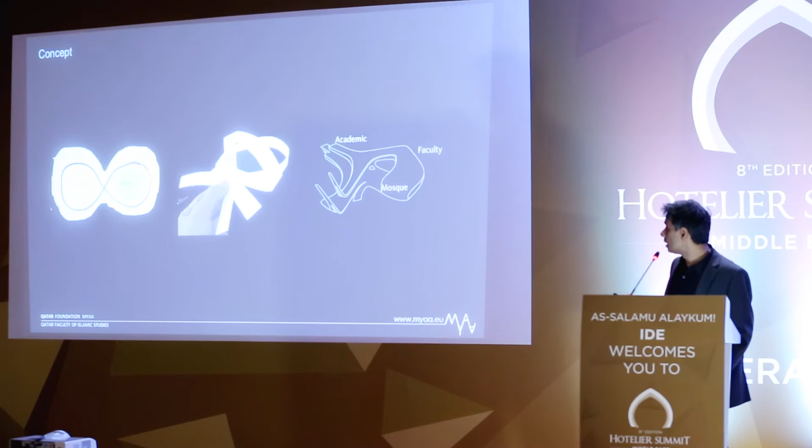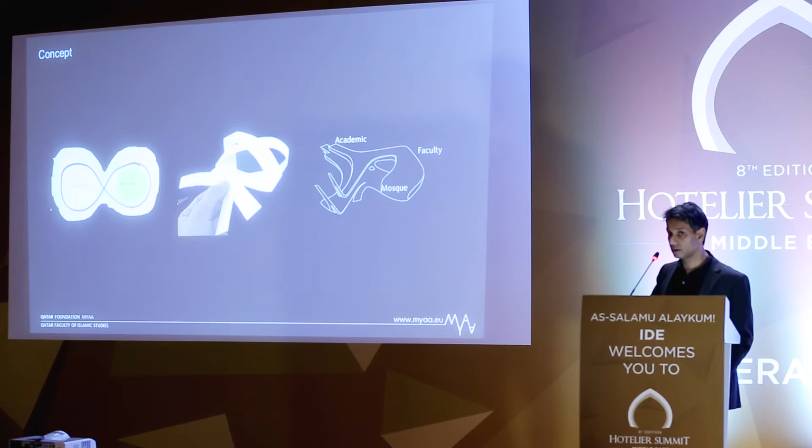In Islam, there is a kind of relationship between prayer and learning. It is incumbent on a Muslim to seek knowledge. So the idea for the building is essentially an infinite loop between learning and the prayer space - there are many paths through the building, and you can always go between the faculty and the mosque.

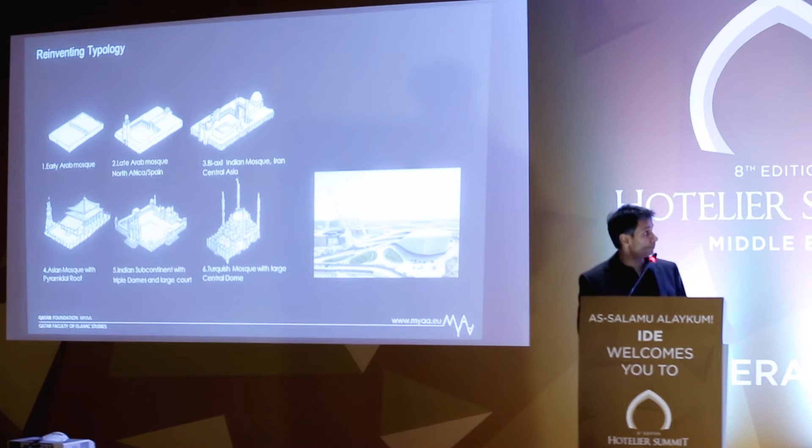The other main idea behind this project is to change perceptions and preconceptions about this type of building. Historically, Islamic buildings, mosques or teaching spaces followed a very traditional route. The thing is that a lot of these buildings are also regional and cultural. So what you might understand to be a mosque, let's say in early Arabic architecture, is different to how it's interpreted in India, and again different to how it's interpreted in China or Turkey.

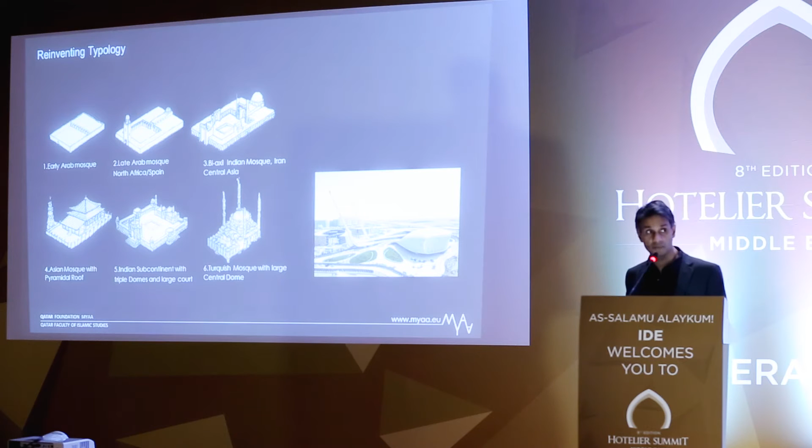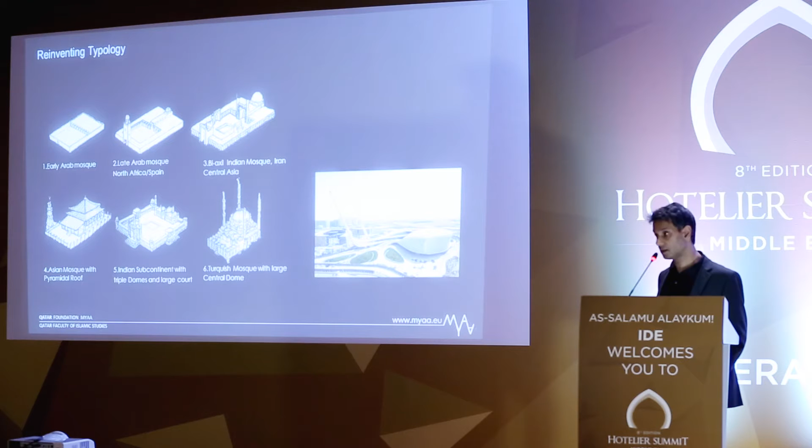What we're trying to say with this slide is that there is no one solution - there are many solutions, and these solutions come out of culture, identity, and the image and direction your community is heading. The idea of Islamic architecture is to try to create something which is at the same time contemporary, but also traditional. How do you do that?

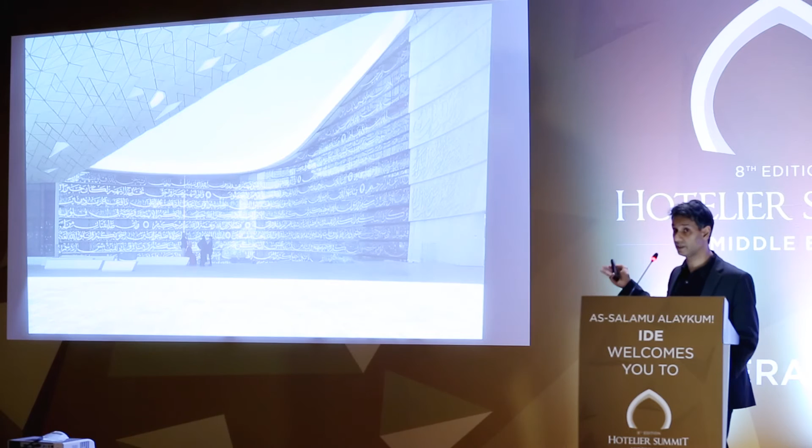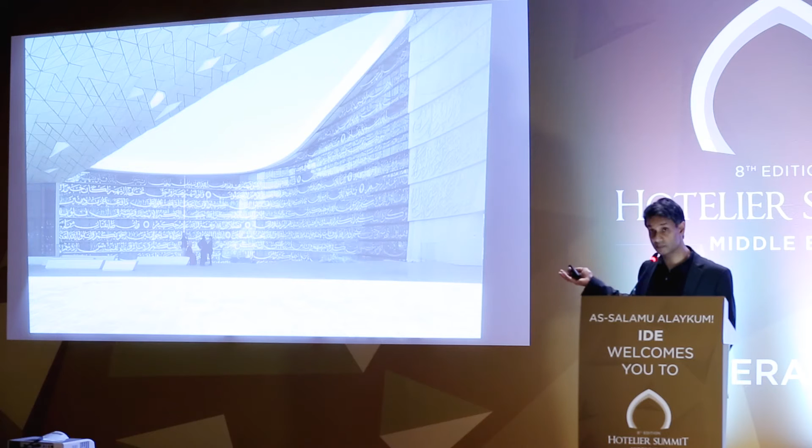This is one of the main courtyards of the building, which has verses from the Quran. So it's a very contemporary courtyard, but again it's overlaid with traditional verses from the Quran, which appeal and address the local audience.

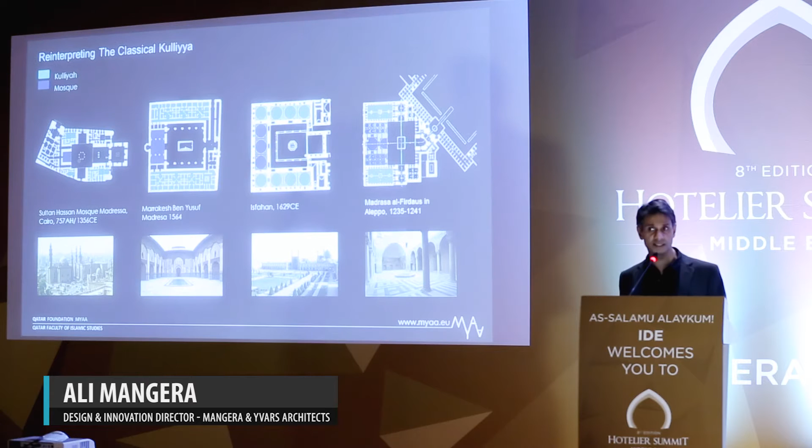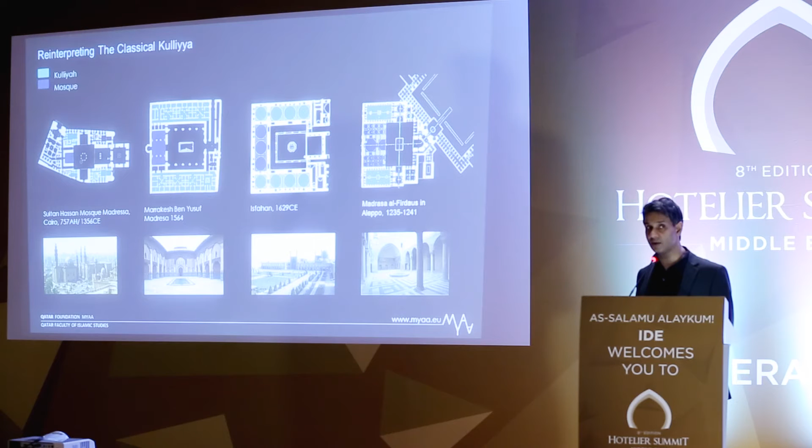We're also changing the perception of how ladies and men can interface with each other. So the prayer space is also accessible to ladies, and I think this, for the Arabic world, is quite an achievement. I think it's very important that women in this society are not only educated but allowed to participate on an equal basis with their male colleagues. I have to say that Qatar Foundation, and Qatar in particular, are really ahead of the curve.

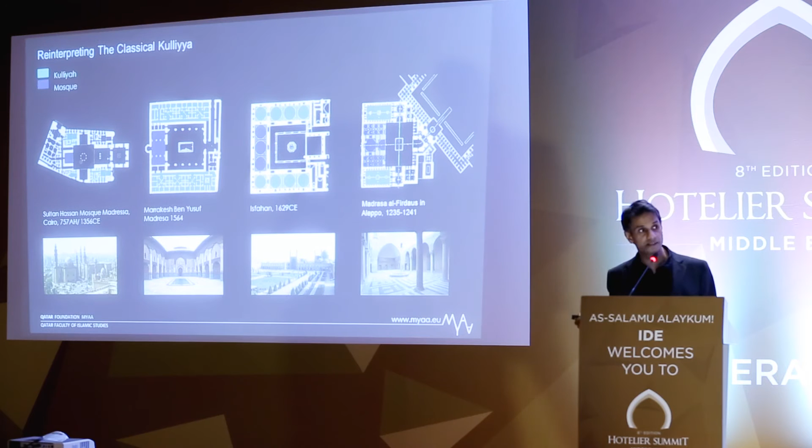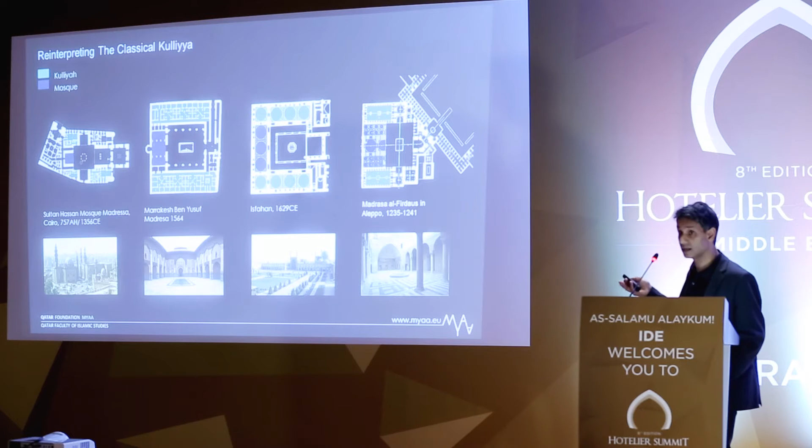How we developed the project: although it looks like a very contemporary building, we started to analyze very traditional buildings performing the same function. Here we've got a building in Egypt, the Sultan Hassan, and other examples from around the Muslim world. Essentially, the light blue is the teaching space, and the dark blue is the prayer space.

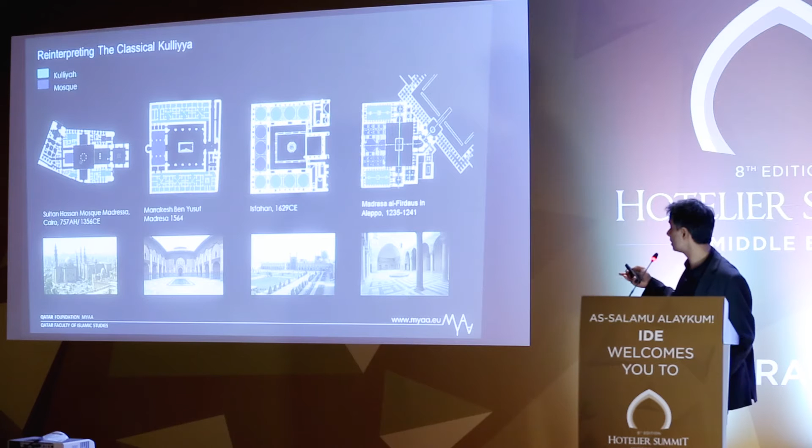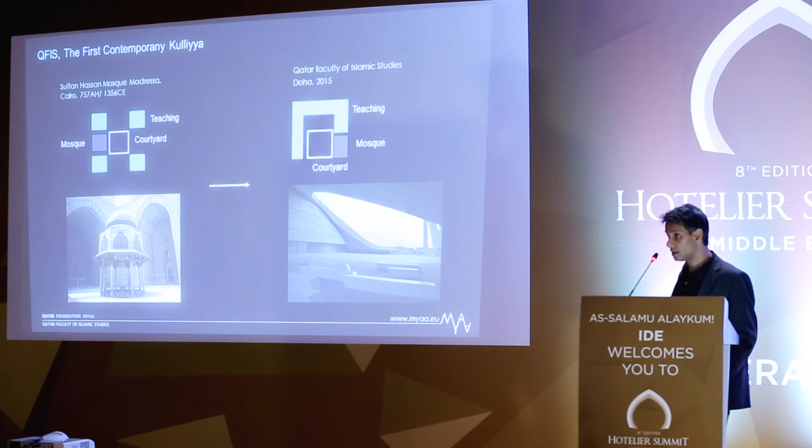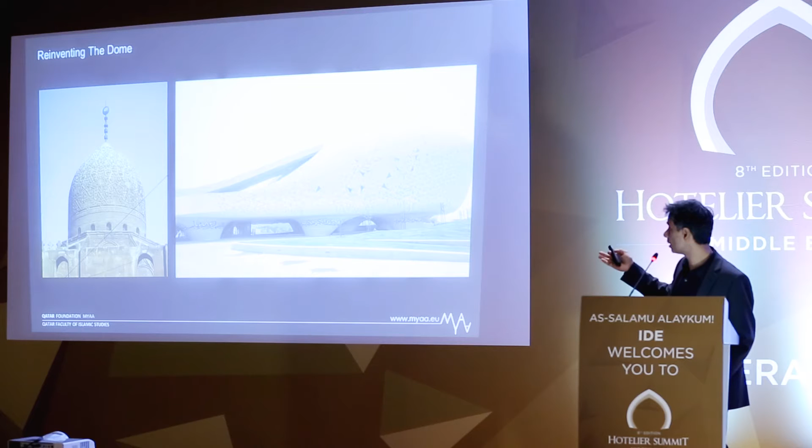So what we did was unpick the arrangement - how you unpick the prayer space and how you can reposition it. So although it looks like a very contemporary building, the ideas are actually more or less from a very old set of principles - reinventing certain established ideas. Here we have a dome, and we reinterpret it using tiling, using panels, using ceramics in a very contemporary way.

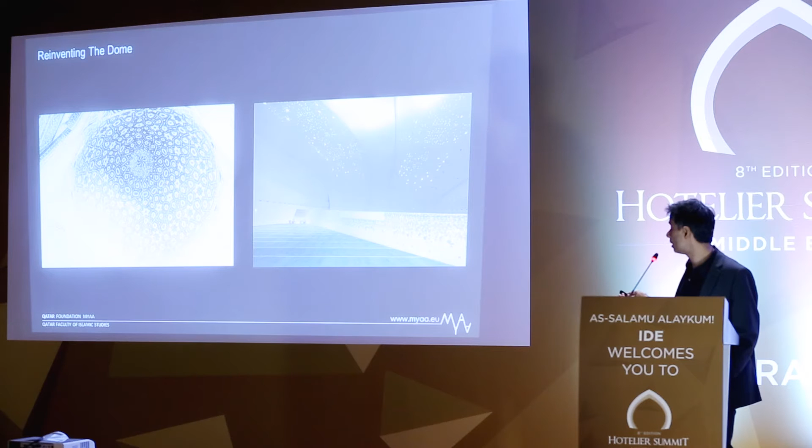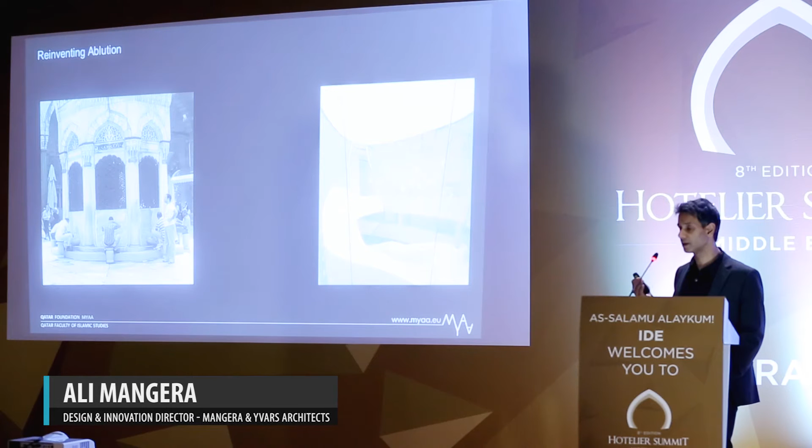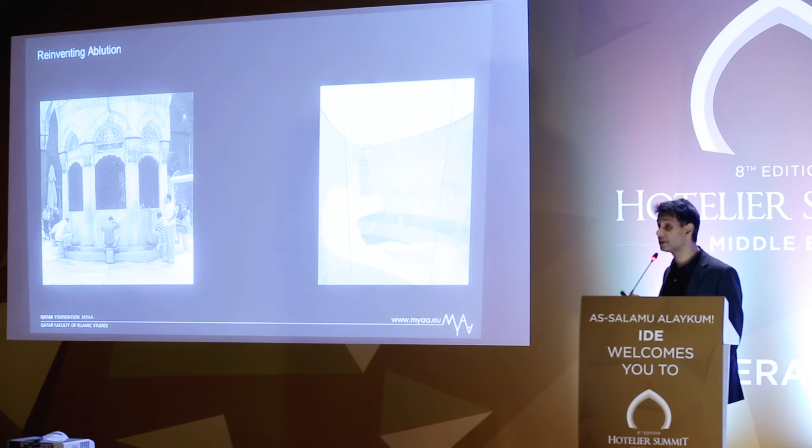Ablution is very underrated in a lot of buildings, because it's a very key moment. It's when you're going from an outside space, cleansing yourself, and then entering a spiritual space. This moment of transition, I think, is very critical.

I think how some historical buildings, for example in Istanbul, interpret this are quite powerful, and we try to do something similar in this building.

We have an enormous staircase which runs maybe 5 stories with water coming down, and it's kind of a symbolic separation of the faculty from the mosque. Also, you create these microclimates, these gardens around the building.

One of the key spaces is the entrance. As you approach the building, it's lifted on the 5 pillars of Islam, which have calligraphy on them, and it creates this very cool undercroft space. Symbolically, the building is lifted, and it has a cascade of water coming through it, so it feels like a very cool, refreshing place to be.

This is one of the most popular buildings on the campus because obviously it's a mosque. So people are coming there from outside, and also people are just coming to look at and explore the building.

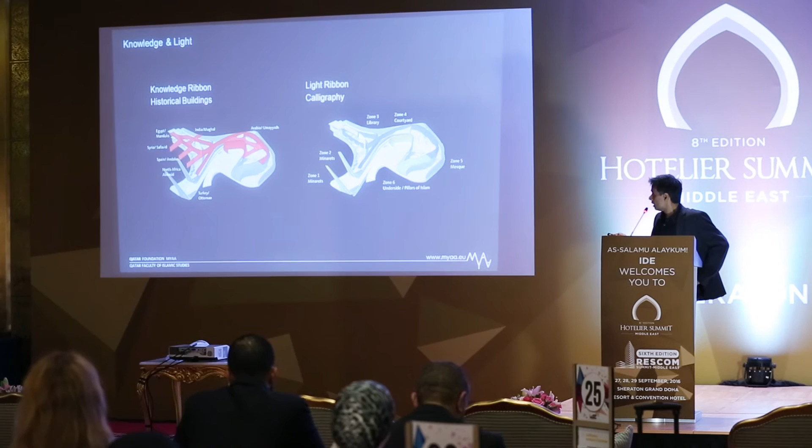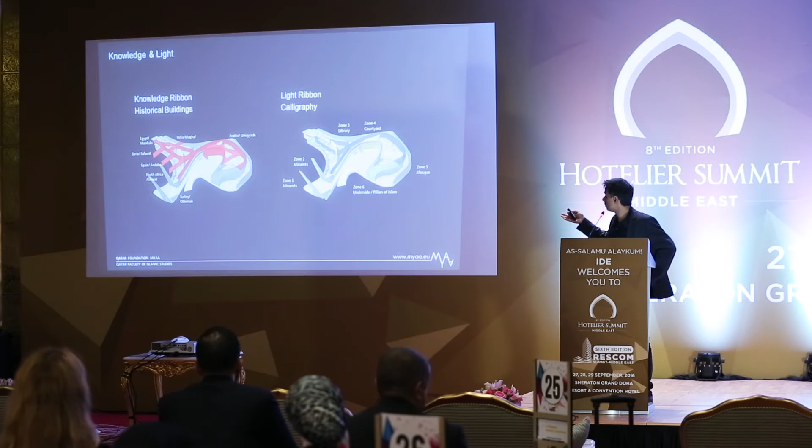The other thing we did, we created within the building themes or areas which pick up on the history of Islamic civilization. So we looked at the Arabic period, the Umayyad period, the Egyptian Islamic period, the Spanish period, and around the world, India. The building is broken up into little themes, and within that we display images of historical buildings. It's a way for students, who are studying law, economics and religion in the building, to also be educated about their culture.

The second ribbon is the ribbon of calligraphy and ayahs from the Quran. They run from the masjid right up to the minarets, a very visible expression.

What's really important when designing contemporary education space is not to think about classrooms as a place where you just sit there and the teacher teaches you. It's about how students are mixing, how different students are coming into the building, what sort of atmosphere you're getting, how you can create incidental encounters and meetings. Through that, you can generate new ideas so students can get enlightened in that process.

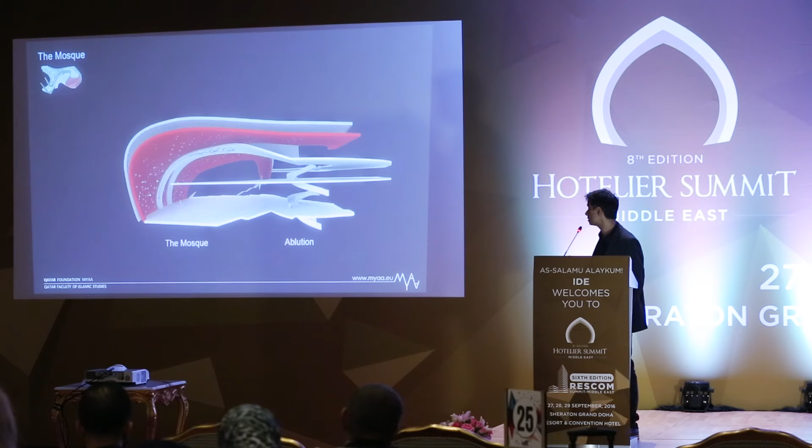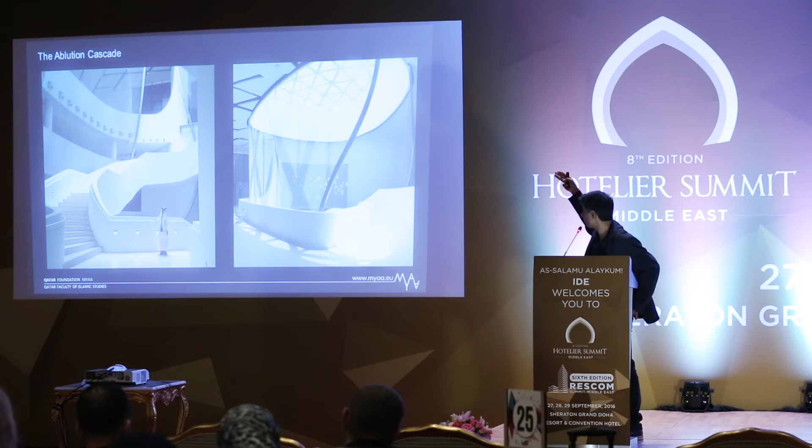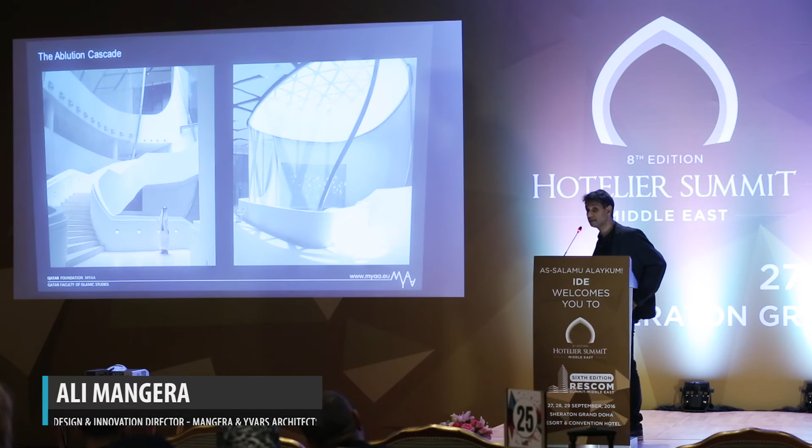These are some of the staircases, which are all very sculptural. The ablution - we're trying to balance this, and there are some issues that we're finalizing. But this whole wall, it's like a mesh, a very fine mesh, has water coming down 4 stories. So when you're inside that space, the staircase going up the building, it's an amazing experience of the water coming through. You're like in a vessel with water, but walking up some stairs. It's something that's never been done.

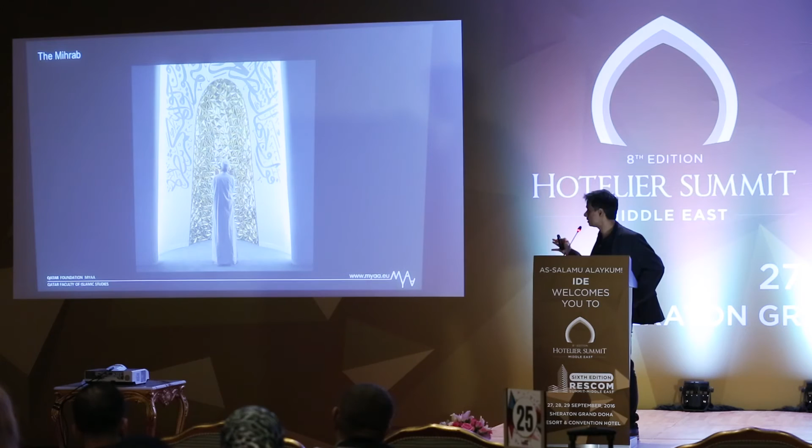These are just some of the underlying ideas that have gone through the project - how we created the calligraphy, how we built it. Because small things like if you have the calligraphy on the outside and then the sun comes through, and if you're walking, you might be walking on the letters from the Quran. So you have to create a diffusion, you have to break the pattern of light. So we have a secondary screen that does that. Lots of little things have gone into this.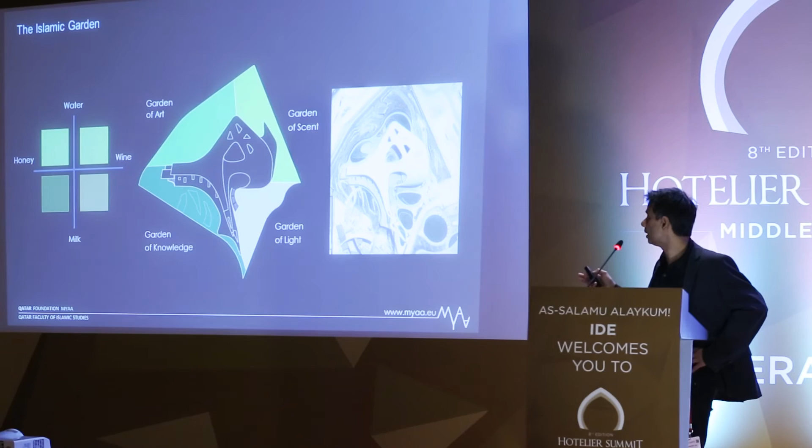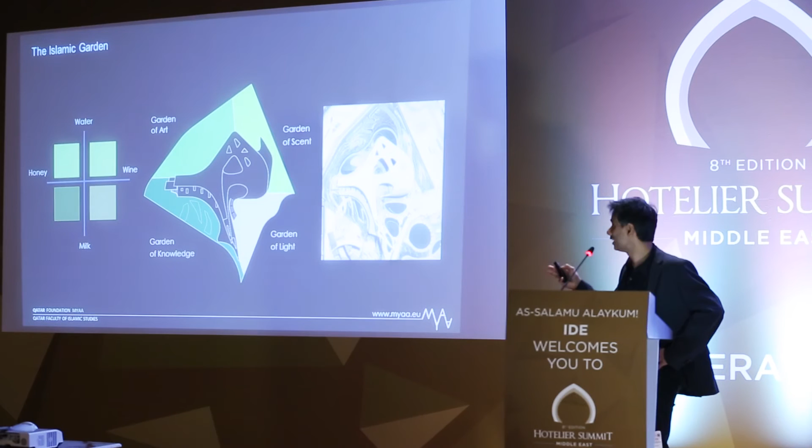So even things like the gardens are based on an Islamic metaphor. A traditional Arabic garden, or if you look at a Moroccan garden for example, is a 4-part Islamic garden. And the gardens normally have water, and the 4 rivers of paradise - river of wine or alcohol, water, milk, and honey - these are the 4 rivers. So we have these 4 rivers running through the project, which break up the landscape. And also we have 4 gardens around the building.

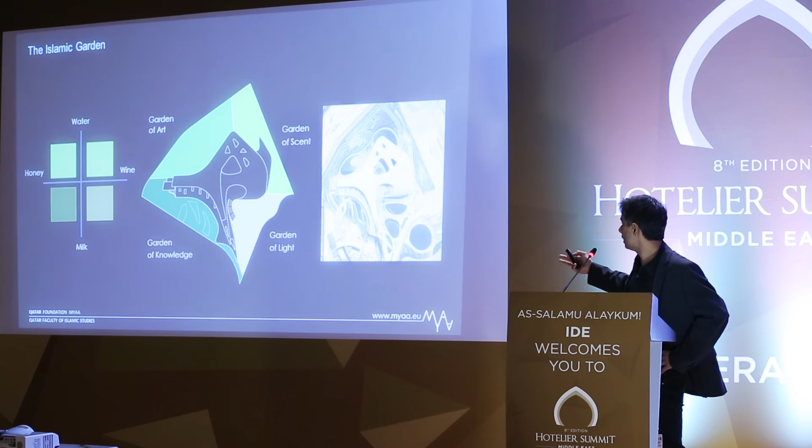So on this side, a garden of knowledge where you can sit outside and learn, read your books, and have a dialogue with the neighboring building. And then a garden at the rear where you can sit down, it's like an outdoor lecture theatre. And then another 2 gardens on the side.

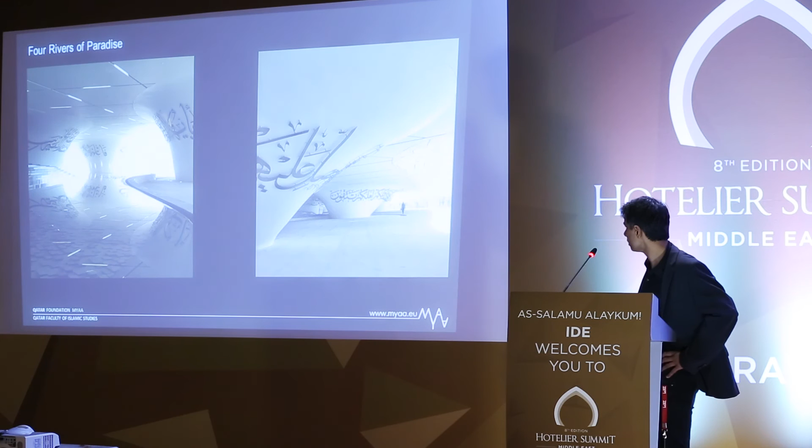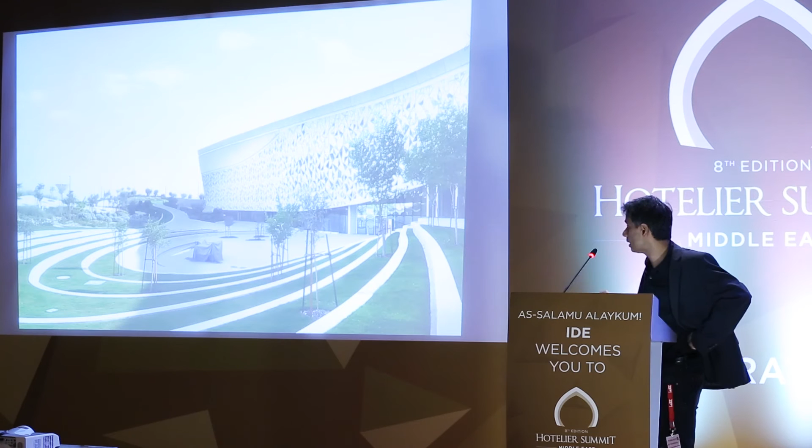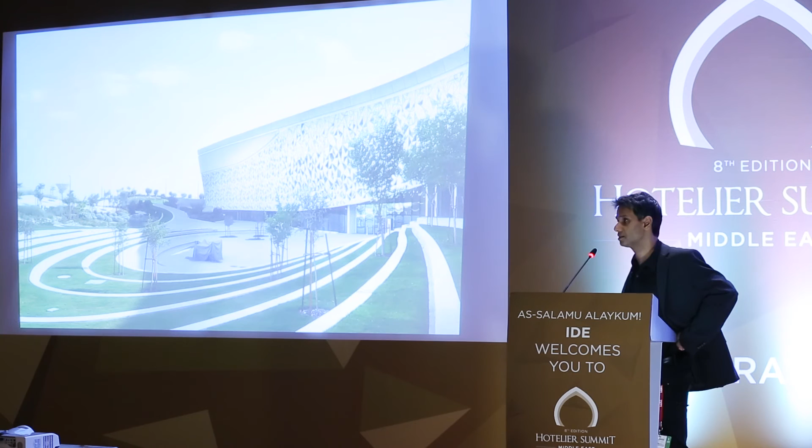Some of the outdoor landscaping. This pattern that you see, I'll come to that in a minute, but it's very carefully calibrated so the light in the building gives you natural daylight, but not solar heat gain. So the whole facade has been modulated to allow for that to happen.

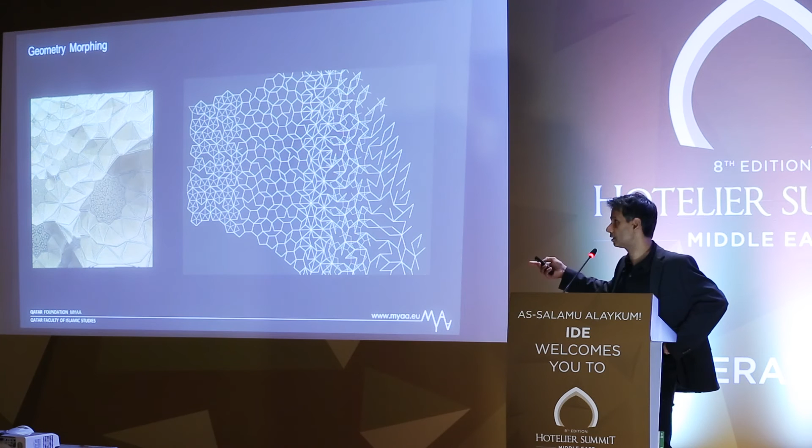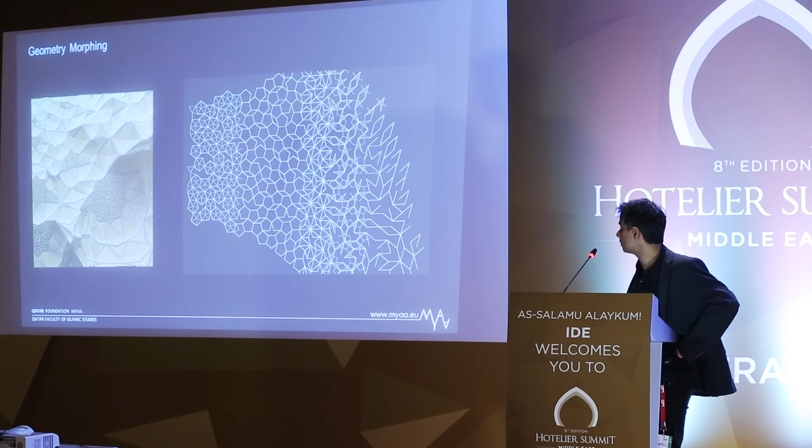We started by looking at how, it's really simple just to have an Islamic pattern and say, oh well, you have a pattern. But how a pattern can change, how it can evolve across the building. So we started looking at how patterns can morph and one pattern can become another, which I think could lead to other solutions. And this is a kind of typical tiling model.

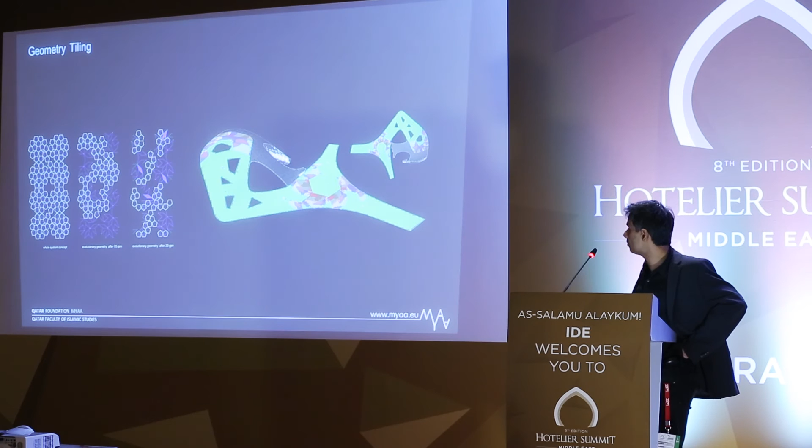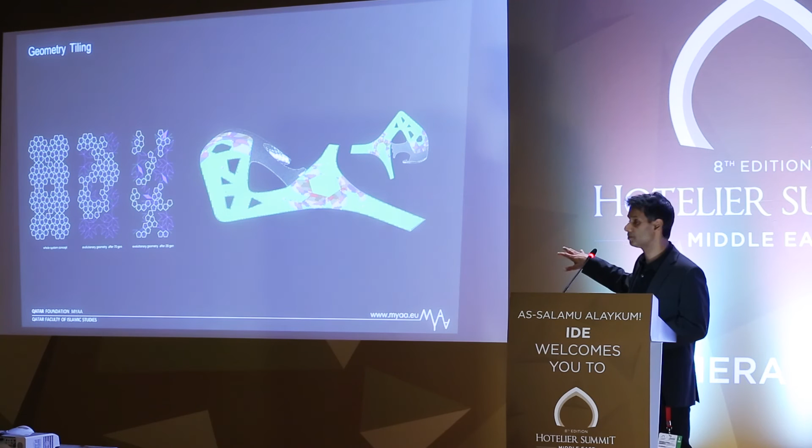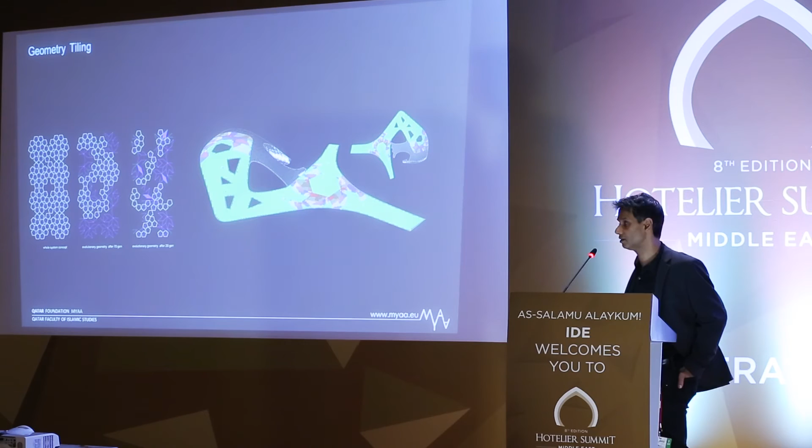The building went through a very advanced parametric analysis where we had to build the building and the concept. In order to do that, we had to run it through these scripting computers and work out where the stresses are, how the panels are going to work. And then from that, the drawings and the 3D model can be given to the fabricator, so the gap between design and construction is merged. A little bit like some of the ideas that some of your colleagues were talking about earlier.

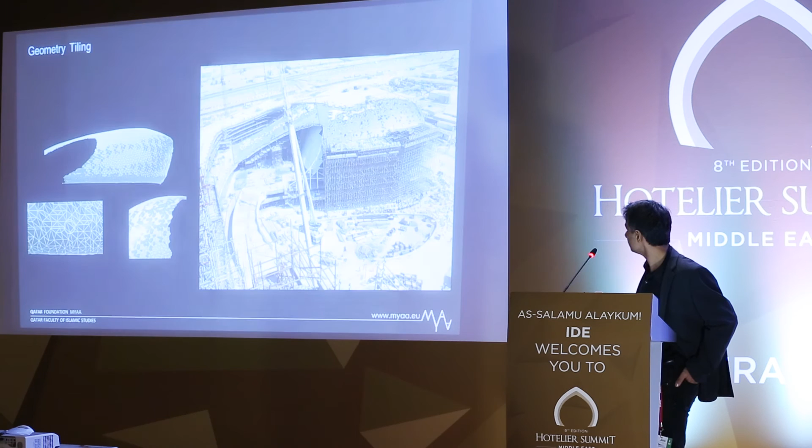Some of the construction images - we had, I think, 4,000 people working on site at any one time. Taken from the tower crane.

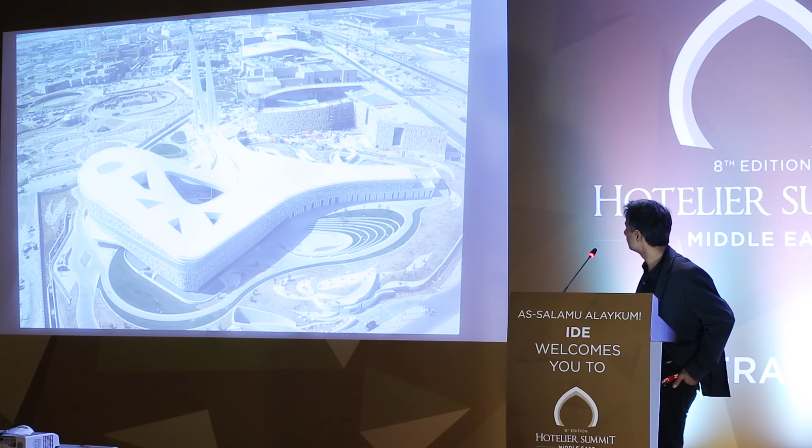Okay, so that's the Qatar faculty. I'm going to show you another project we're working on in Jeddah—I have to go quite quickly—but it's quite large. It's in a design phase.

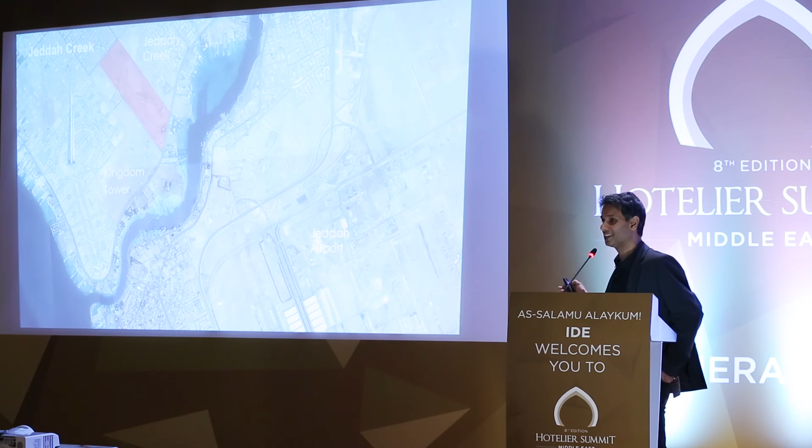It's behind the Kingdom Tower. It's Jeddah Creek. We're interested in organic spaces, how to bring a master plan to life using nature. We were inspired by places like Central Park in New York, and how you can bring these ideas and create pedestrian routes—green pedestrian routes—yet at the same time have the density you need to create an urban matrix.

So here we have very high-rise buildings, hotels, offices. On this side you have a souk. But again, all the time you have very narrow, compressed green routes. So it's a very pedestrianized city, whole district pedestrianized.

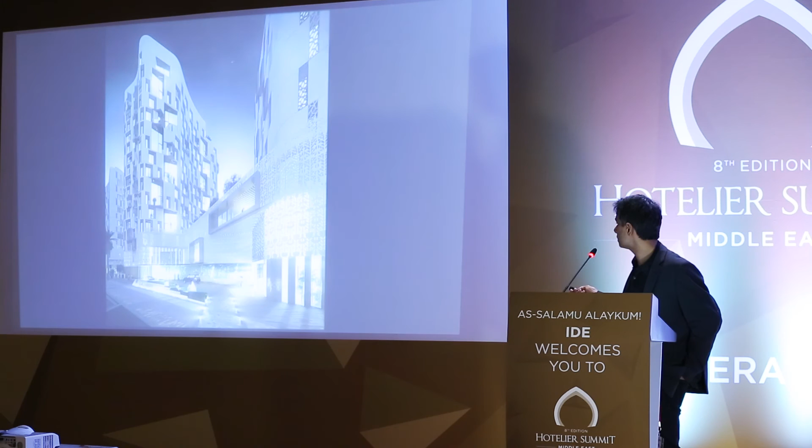I think we started in 2011, and it sort of finished 2015—four years.

I can't, because it's not even something I know. But it's not what you think, because we were very fortunate to have a client that wanted something powerful for that part of the education city. The scheme is extremely rational. If you understand the efficiency of spaces, where you have a really high efficiency of spaces within it, then you have to factor in that there's a mosque element to it. Mosques in the region are normally a little bit ostentatious. So it has so many functions that you can't just measure it by saying, well, it's a faculty. It's a really efficient scheme which brings in people who are not students, and has a much greater remit than just education.